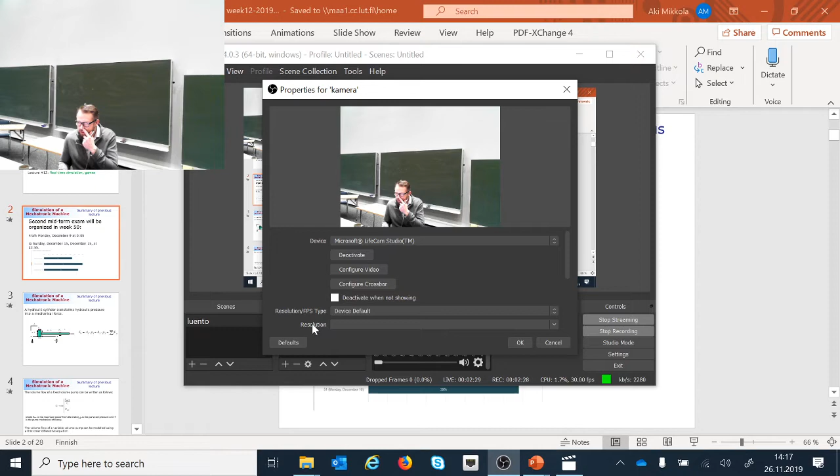How is my streaming? Voice. Okay. So let me take a look. I was almost this close to saying look at my streaming today, because it should be with no technical difficulties whatsoever. Let me see where the problem is coming from. So this is correct. Is this a mic here too? Okay, so is this helping at all? Is it possible that online participants can make a comment if there's still a problem? Okay. Is this helping? Well, I have a new computer today, but I don't know where the echo could come from. Is it helping at all? It's working now. Okay, that's good. So the camera was using a mic as well, so it's muted now, so it should be all right.

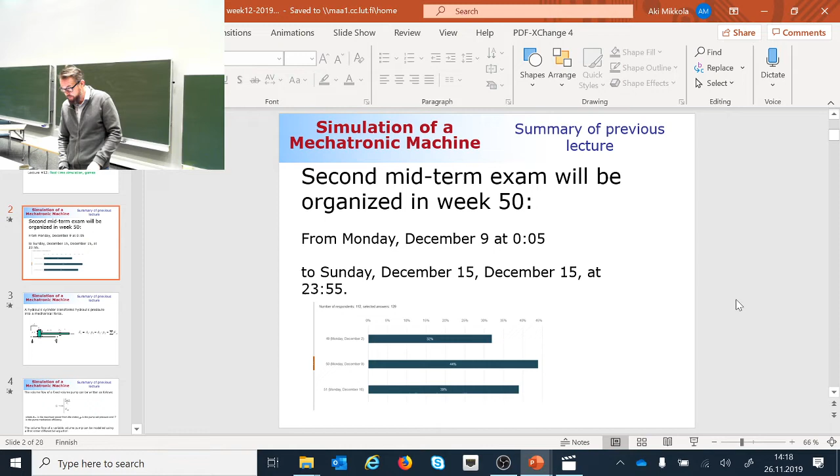So let me go back to my presentation. I'm very proud of this because my new computer is not making any sounds whatsoever; the previous one was making those dying noises. That is missing. How come that is missing? So was it on there already? And now it is back on. Okay, so I was just telling how proud I am of my new computer, which is not making any sound whatsoever. And not just that, but I finally figured out how to make nice streaming art. Look at how it is. For you it looks perfect, and for online participants it should look perfect too. And it took me 11 weeks to figure this out, which is not that bad because finally the last lecture should be perfect.

Okay. Anyway, I was about to explain that the option related to week 50 was the winner this time. So the exam will be put on Monday, December 9th, right after midnight, and it will be closing on Sunday, December 15th, just before midnight. So that is the time period in which you can make your 2 attempts to do your second midterm exam.

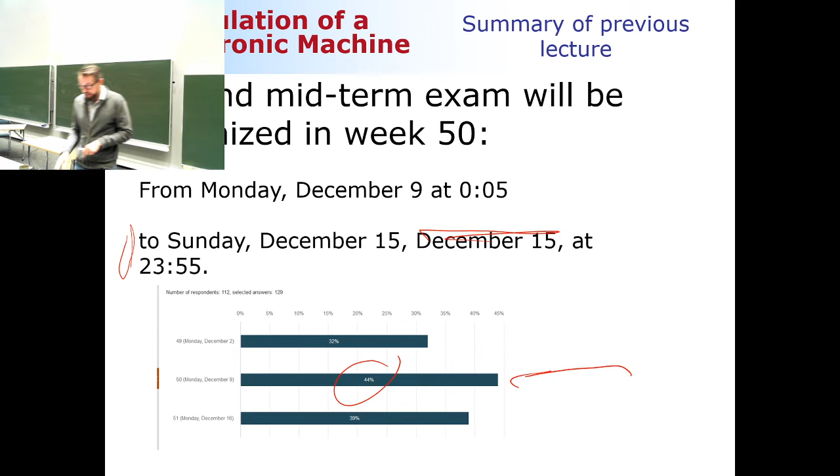Okay, so just shortly, let's summarize what we discussed last week. Last week we completed the discussion about hydraulic modeling, and we looked at two components. The first component was the hydraulic cylinder, which is a very simple hydraulic component, and that's the one converting hydraulic pressure into mechanical force. The pressure applied on the piston side is multiplied by the corresponding cross-section area, and from that is subtracted the pressure on the piston rod side multiplied by its corresponding cross-section area. That's the net force the hydraulic cylinder is capable of producing.

Then, due to the sealings here, which prevent oil coming out of the cylinder and prevent oil traveling through the piston, there is a friction force. And the friction force is typically something where the stick-slip phenomenon takes place. By the way, an often asked question in the written exam: what is the stick-slip phenomenon? That's the fact that static friction is higher than sliding friction. And that's what causes that noisy movement, which can take place also in a hydraulic cylinder.

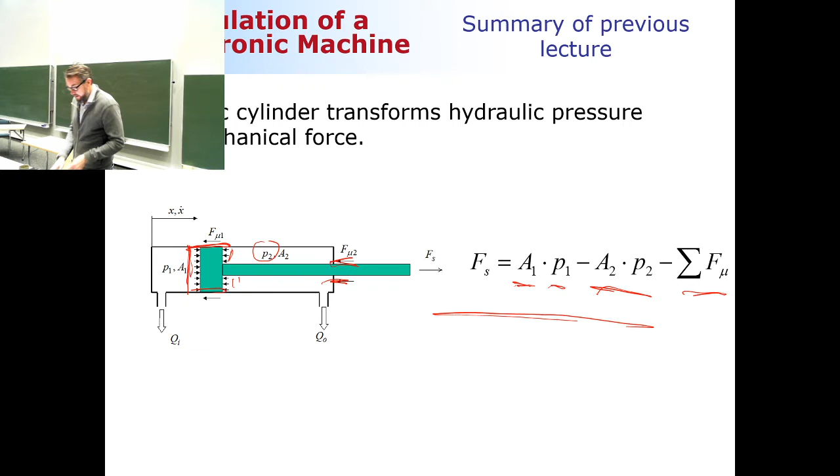Then also last week, we shortly looked at the pump models. And generally speaking, we have two different types of pumps. So we can have fixed volume pump. And in the case of fixed volume pump, we need to compute two equations: the one that is limiting the flow rate based on the power, and another one that is limiting the flow rate because of the geometry, and then selecting the one that is producing the lowest numerical value.

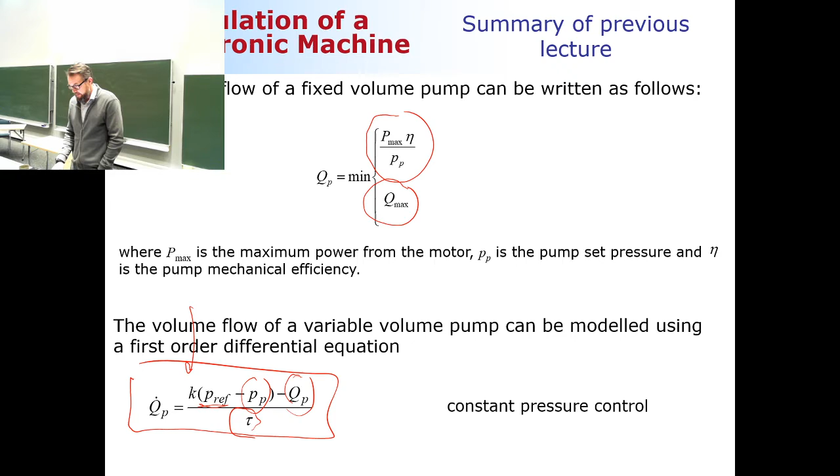And in a variable flow pump, the flow rate can be computed by using a differential equation. And this differential equation is a first order differential equation where this is reference pressure, this is a pressure measurement right after the pump, this is a flow rate that the pump is producing at any given time, and this is a time constant. K here is a semi-empirical parameter that can be obtained from manufacturer's catalog. So that was the last remaining component in hydraulics, and then we step into the flexible bodies.

And now, in flexible bodies, how is the picture at the moment? The picture at the moment is such that commercial software that are focused on multi-body system dynamics can, of course, handle the cases and systems where all the bodies are assumed to be rigid, and they can also handle the cases when there is a small deformation, which can be modeled by using the method that I'm about to explain to you next. Then, what some of the commercial software is able to do today, and some are still looking for ways to do, is related to large deformation.

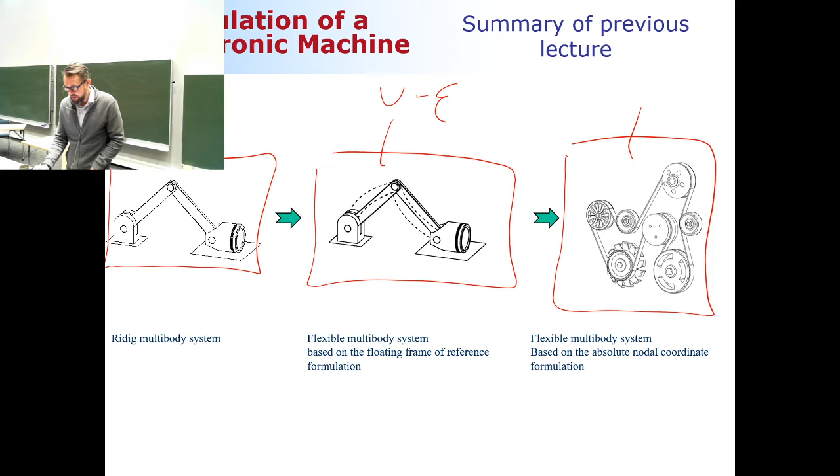The difference between the small and large deformation is how the strain-displacement relationship is accounted. If we are assuming the displacement-strain relationship to be linear, that means that we cannot capture large deformation. In turn, if this relation is nonlinear, then we can capture the large deformation. And then it's also possible that there is a material nonlinearity, which tells that the strain-stress relationship, this is stress, this is strain, is nonlinear, which is not often the case in machines.

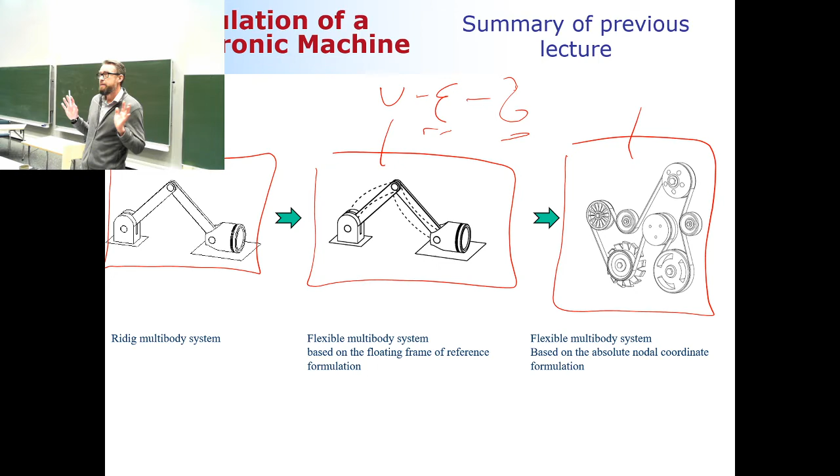Okay, so with that, one more slide about the summary. We looked also at the lumped mass approach, which is not strictly speaking within the family of flexible bodies, because this is an extension of rigid bodies. How does it go? Typically a beam-like body is divided into a number of rigid bodies. And what comes between these rigid bodies is the spring elements, introducing spring coefficients to all 6 degrees of freedom. So this approach is not requiring any extension in the theory because it is still using rigid bodies. Springs are external applied forces, so actually no need to change anything in the theory.

The problem associated with this method is that it easily leads to numerically very inefficient models. And inefficiency comes from the fact that there are very low frequencies and very high frequencies associated with this structure. Low frequency, if you think about the beam-like structure, could be deformations associated to bending. The frequency associated to bending deformation is typically very low. If you want to know the numbers, say 50 hertz or less is a typical value.

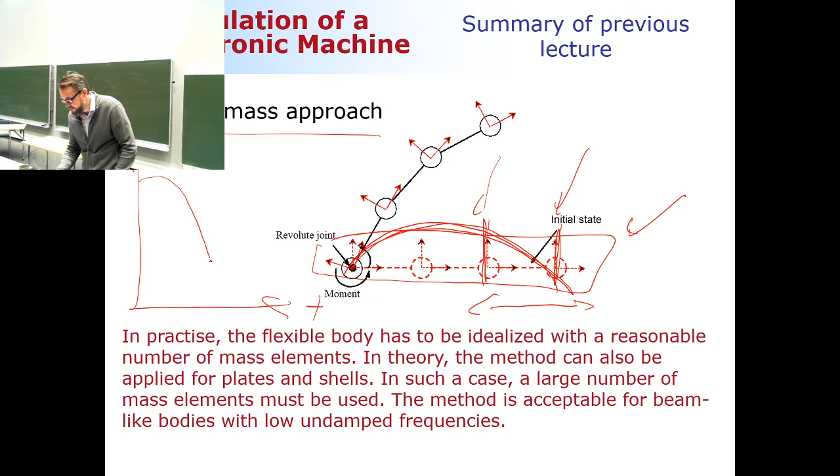Well, response-wise, it looks such that if this is, let's just say, time, and this is a random response associated to this particular structure, if there is a loading of this structure, it looks like this, so no surprises. But when you take a close look, when you magnify the details of this curve at this particular point, you see the response includes high frequency vibration.

And this high frequency vibration is something that integrators are able to detect. They realize that something is moving there, although in the big picture it makes no difference whatsoever. But the integrator is able to detect this, and then it will adjust its time step such that this high frequency vibration is captured as well. And that's what slows down the computation.

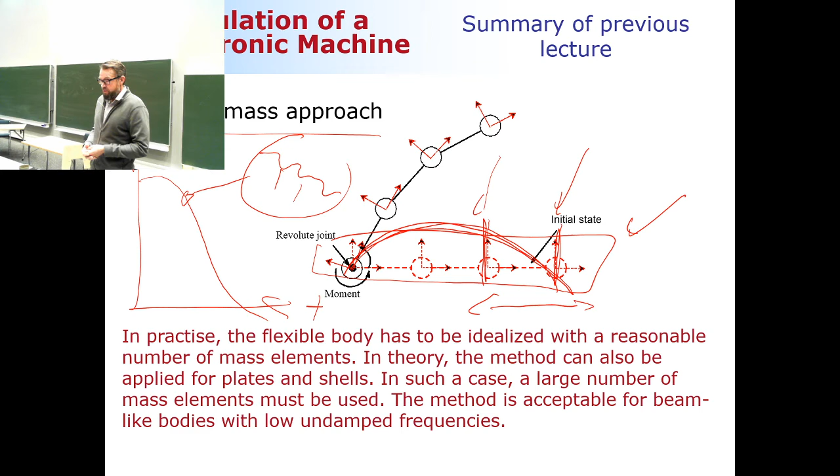And that's why the good modeling policy is that you want to set all the frequencies to be close to each other. It doesn't really matter if they're high or low, but they should be somewhat close to each other. And that helps to compute things efficiently.

Okay, now the final thing, let's close this case about flexible bodies. The final thing that I would like to explain here is the policy that is used very much in today's industry. This policy to model flexible bodies is called the floating frame of reference formulation. It's a monster name. But what I would like you to remember is that this is a method that combines the finite element method and multi-body system dynamics.

It goes such that you start from the kinematics, and you look at how the kinematics of a deformable body can be described. An example is shown here. Here I have a potato-shaped body. This is in three-dimensional space, so it's a spatial case. And I have here one point, which is called P again. So it's a particle P that we are very familiar with.

In the case of rigid bodies, we first describe the translation of the body reference coordinate system with the help of vector R. We're going to do the same here. And then we describe the orientation of the body reference coordinate system with a rotation matrix. So everything is what we are used to dealing with.

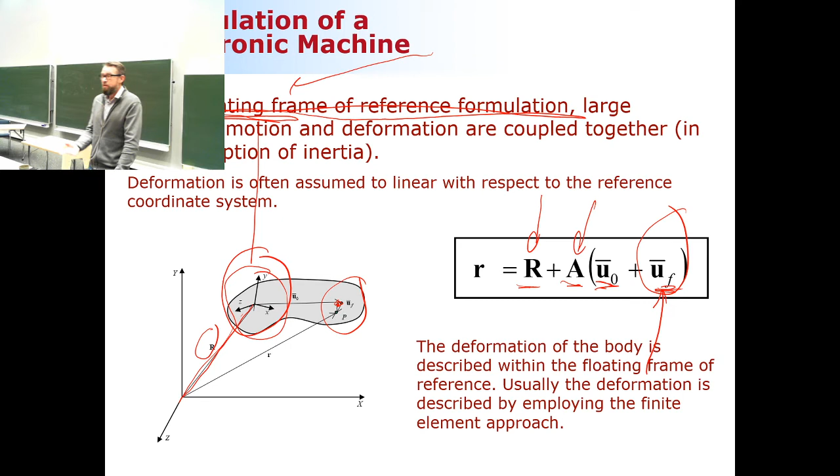Let's just call it a body reference coordinate system, and that's the one that describes the large rigid body translation and rotation, and then the small deformation with respect to the body coordinate system is described by the finite element method. If you haven't heard about the finite element method, that's fine, because I'm not going to go deeper than that in today's lecture. Okay?

All right, so here's again the big picture. I'm not going to go deeper in my finite element explanation. Obviously, I go a little bit deeper because there's one more slide that tells how exactly the vector U bar can be described. Just shortly, here's the equation of motion that comes from the finite element method, and that equation of motion describes the deformation of this potato-shaped body.

We can use almost any kind of elements we want, but we typically use solid elements, plates, and beams to discretize this body that we are assuming to be deformable. Once we do that, mathematically, the equation of motion looks like this. So I have here again inertia forces, elastic forces, and externally applied forces.

And what I do then is solve this vector U bar, and substitute that vector U bar into my kinematics, and that's how I can account for the deformation. It's a bit of a lengthy story, but this is in a nutshell how it goes.

You happy? Okay. There is one problem associated to this. The problem is the fact that when you look at the usual size of your finite element model, this one, that typically consists of, say, 10,000 degrees of freedom, 100,000 degrees of freedom, a million degrees of freedom in some cases. And now things are not matching that well any longer, because for a single body, you need here 6 or 7 generalized coordinates in the spatial case to describe large translation and large rotation.

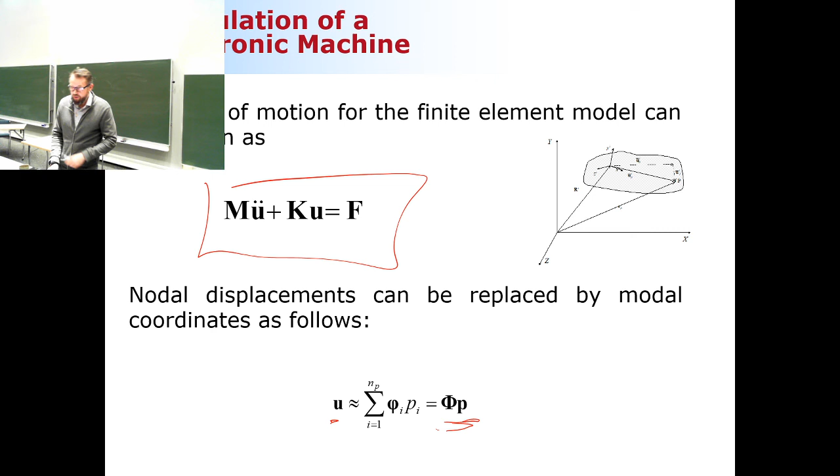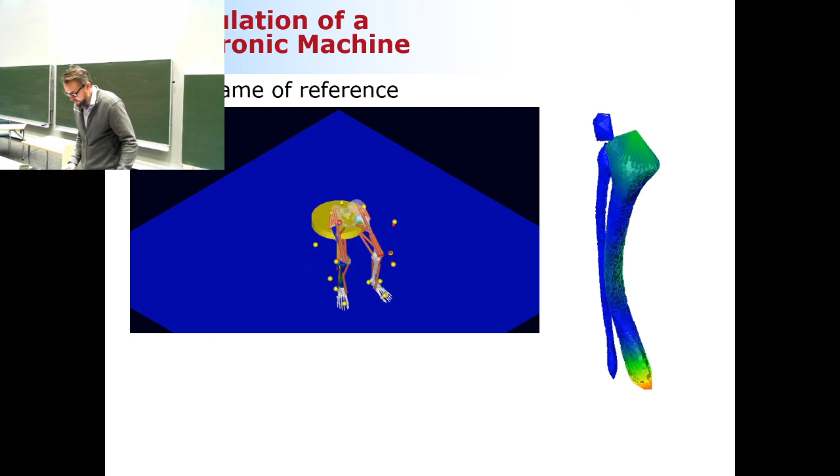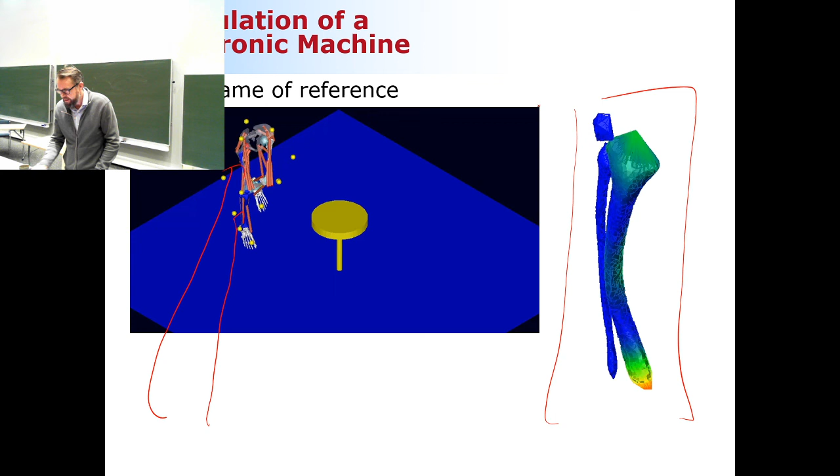All right. So that's how it goes. So it's all about the deformation modes, and here are a few examples. So this is a biomechanical application with the bone structure, the tibia. So let's just run this, and after the animation is done, let me explain this again. So here I have the tibia and a fibula modeled as flexible bodies. And the way they are described is based on these modal degrees of freedom. And how they look is like deformation modes associated with the bone structure.

That you can describe by taking a volunteer, a doctoral student. That's equal to the volunteer. And then you're doing computer tomography scanning and the MRI scanning. Actually, you need the MRI scanning and CT scanning both. Then you can get the geometry of the bone, which in that case is based on a specific bone. And then you can create the finite element model that is describing your bone. And once you have your finite element model, then you can conduct eigenvalue analysis. And with help of the eigenvalue analysis, you are able to move from that nodal space to modal space.

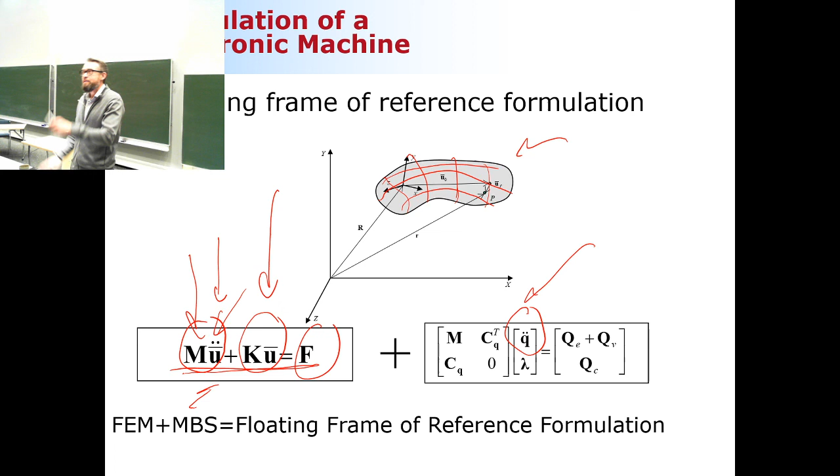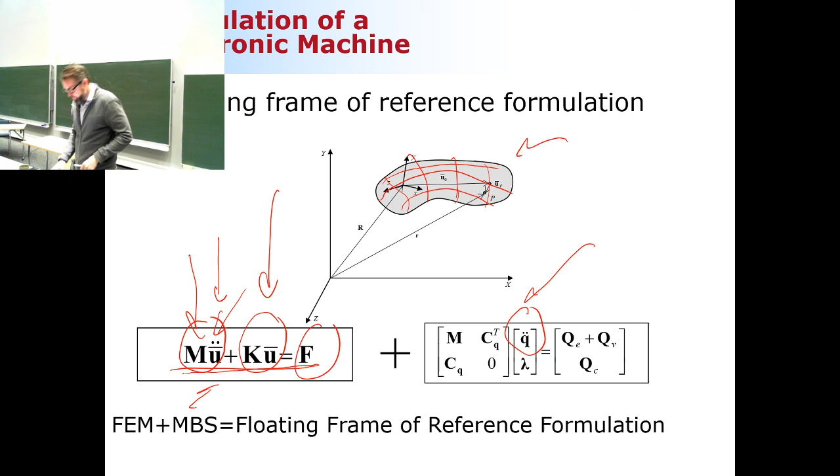And now, if you're completely off what I'm explaining, if you are like, oh my God, nodal, modal, eigenvalue, none of this stuff makes any sense, that's fine. Because the level of knowledge that I'm expecting you to have is this: two methods are combined. And the two methods, one is the finite element method, another one is multibody system dynamics. That's enough. Okay, so let's look at these animations. So that's just the vibration mode of. I'm back. Yeah. So when